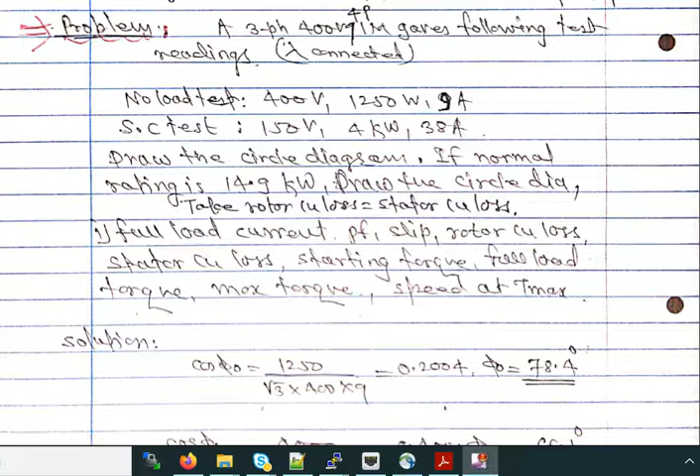Calculate full load current, power factor, slip, rotor copper loss, stator copper loss, starting torque, full load torque, maximum torque, speed at maximum torque, etc. Now from the no load test, we can find out the cos phi 0, and from this phi 0 and the I0 equal to 9 ampere.

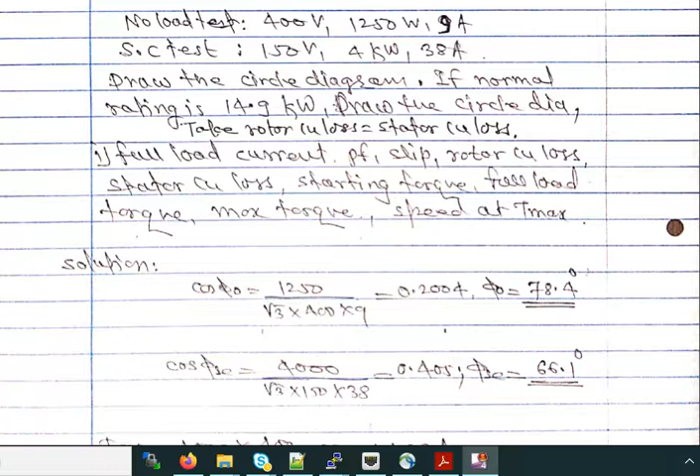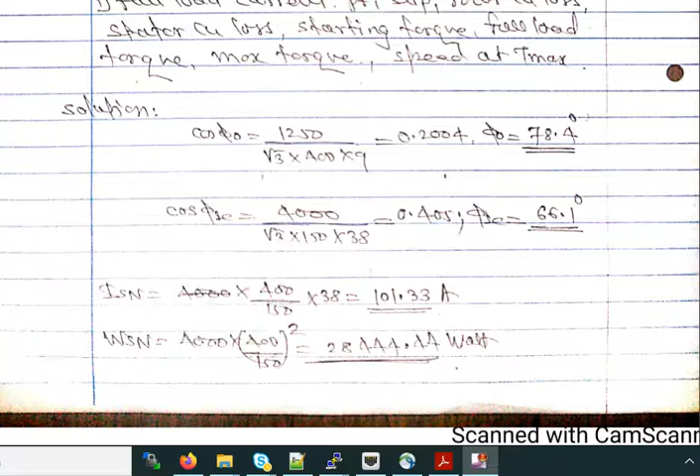Now from the short circuit test, we can obtain the phi SC which is equal to 66.1 degree, and ISN, the short circuit current with normal voltage applied, equal to 101.33, and WSN, that is the short circuit power with normal voltage applied, and that comes to be 28,444 watt. Now using this data, let us draw OX as the x-axis and OY as the y-axis.

The voltage vector represents the y-axis. Now draw OO' equal to I0 equal to 9 ampere, that is equal to 1.8 centimeter, with the scale 1 centimeter equal to 5 ampere. Students, always select the scale in such a way that the diameter of the circle diagram will be around 25 centimeter. This is because all the parameters can be easily visualized,

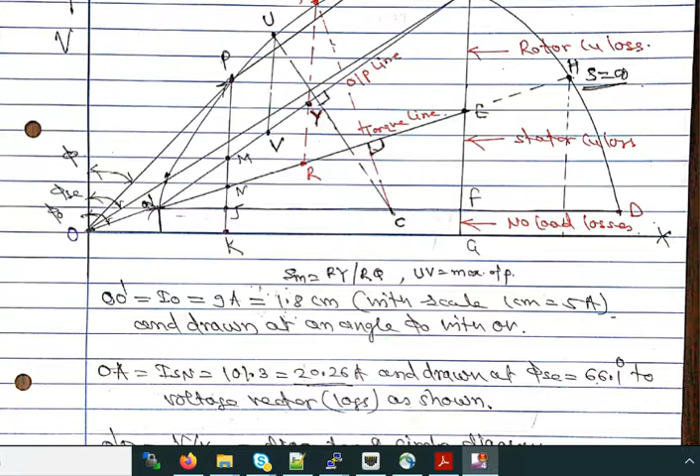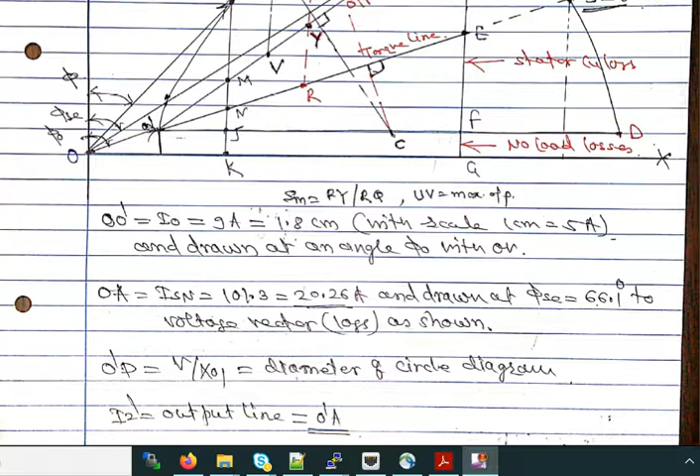and the measurement taken will be reasonably accurate. Then OA equal to ISN, and that is equal to 20.26 as per the scale. Now draw this OA by making an angle phi SC with the voltage vector. Then join O'A. This O'A represents the rotor current I2' referred to the stator side, and it is also known as the output line. Then draw the line O'D parallel to the x-axis.

Now the points O' and A lie on the circle diagram. Now obtain the center by drawing the line perpendicular to the output line, which is a right angle bisector. Now from center C and radius CO', draw the circle diagram. Now the points O', A and D lie on the circle diagram. Now from the point A, draw the vertical line perpendicular to the x-axis.

Now this AG represents the short circuit power with normal voltage applied. Out of that, GF is the fixed losses and AF is the total copper losses, that is rotor copper losses and stator copper losses. Then the line represents the torque line which separates the rotor copper losses and stator copper losses. When you extend the torque line so that it cuts the circle diagram at point H, it represents the slip at infinity.

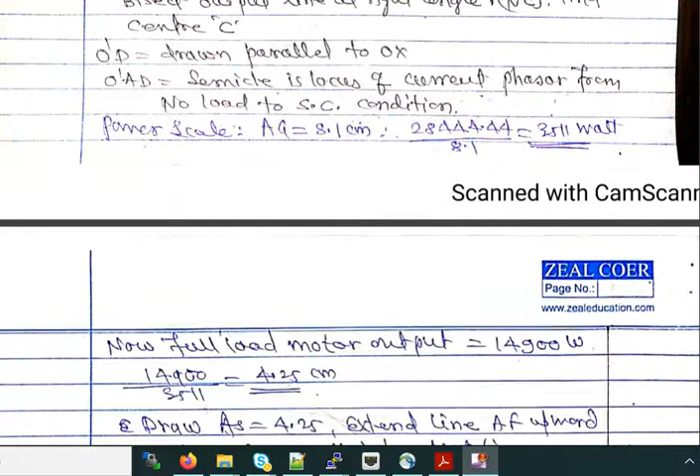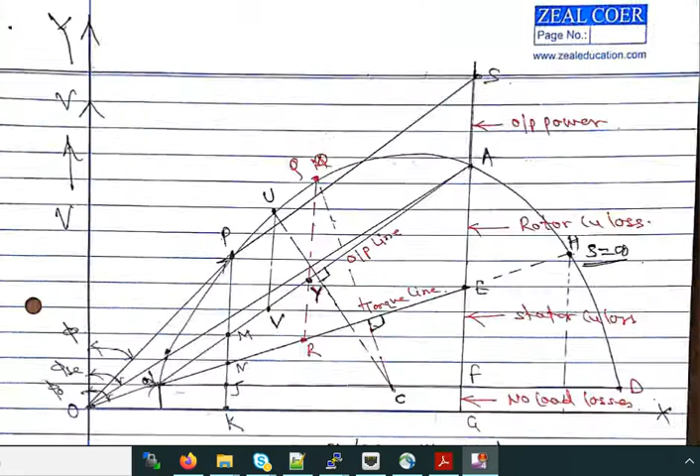Then measure AG, that is equal to 8.1 centimeter, and from this we can obtain the power scale, that is equal to 28,444.44 divided by 8.1, that is equal to 3,511 watt. Now the full load motor output equal to 14,900, and therefore as per the power scale it will be 4.25 centimeter. Then draw the line AS 4.25 centimeter. Extend from point A as AS, and that measures 4.25 centimeter.

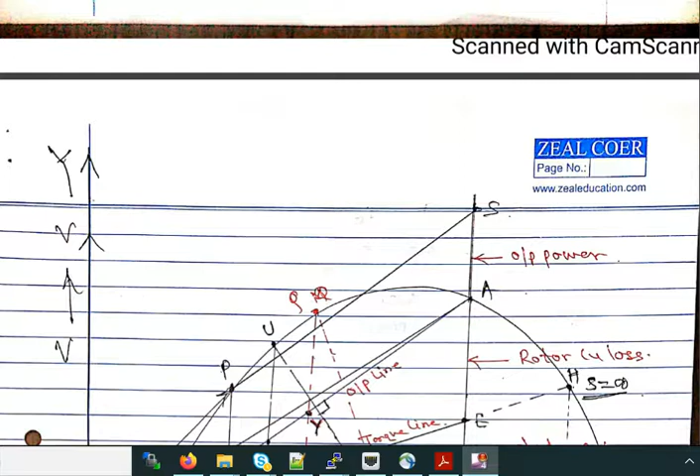Then draw the line PS parallel to the output line. Then the point P intersects the circle diagram. From the point P, join O. That means OP represents the full load current lagging the voltage by an angle phi. Now from this point P, draw the vertical line that is perpendicular to the x-axis, that is PK.

Then make the marking points M, N, J, etc. Now let us find out the full load current, that is OP, and that is measured 6 centimeter, and therefore OP equal to 30 ampere. Now this is 6 centimeter, and as per the scale, 1 centimeter equal to 5 ampere, it is equal to

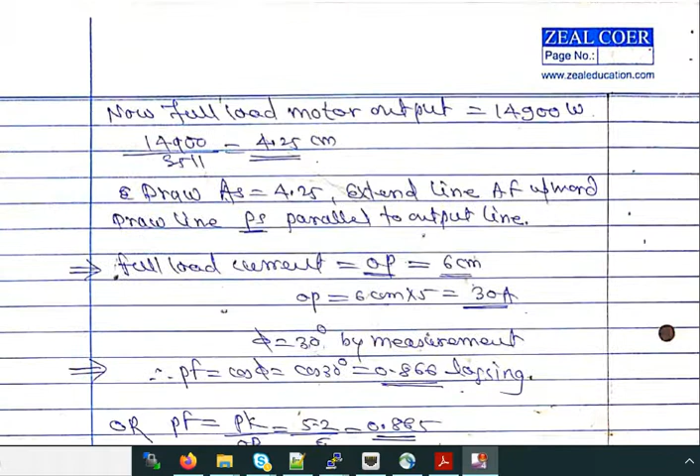30 ampere. Now the power factor, if you measure this phi, it is found 30 degree, and therefore cos phi equal to 0.866 lagging, or otherwise power factor equal to Pk upon OP, and Pk upon OP, that is measure 5.2 divided by 6, equal to 0.865 lagging.

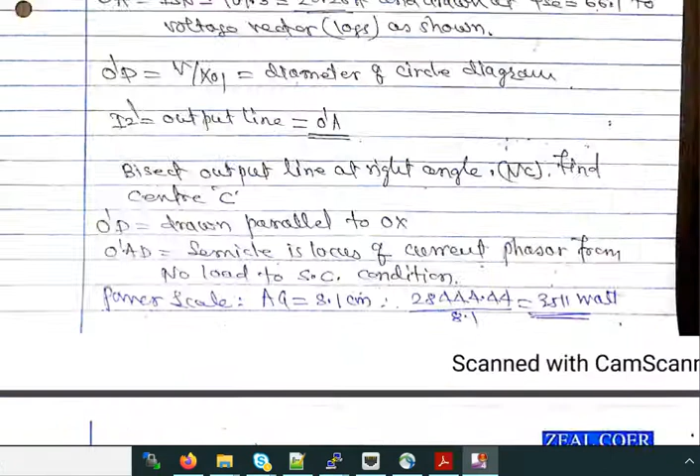Now let us see the slip. Slip equal to rotor copper loss upon rotor input. Rotor copper loss, here Mn represents the rotor copper loss, which is proportional to the starting torque, and Pn measures the rotor input, which is proportional to the full load torque. Now here slip equal to Mn divided by Pn, and that measures to be 0.3 divided by 4.5, and that is equal to 0.067. Thus the slip is 6.7%.

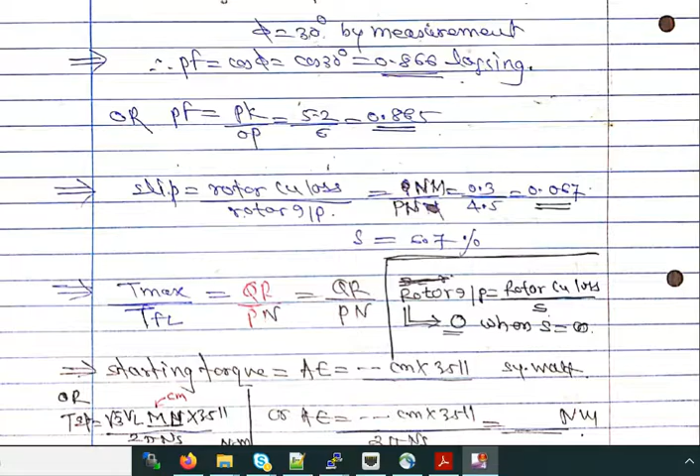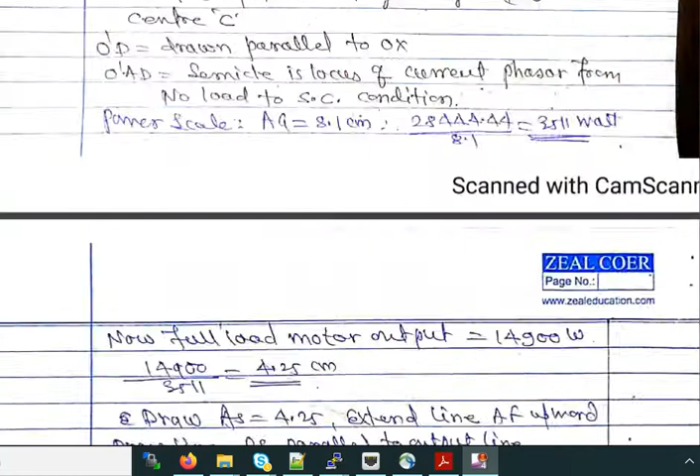Now let us observe here the AE represents the rotor copper loss, and EF represents the stator copper loss, because these two losses are equal, it is given to us. Therefore this AE is nothing but rotor copper loss, and that is directly proportional to the starting torque. Therefore starting torque TST equal to AE to the scale multiplied by power scale divided by 2 pi ns. See, this starting torque equal to AE in centimeter multiplied by this divided

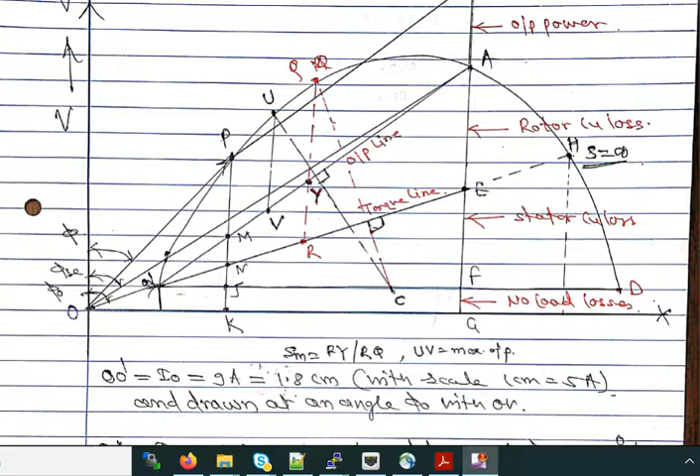by 2 pi ns. This is the starting torque, or this can also be obtained by, see here, the starting torque is represented by Mn, and therefore as the voltage vector is vertical, all the vertical measurements are the active power, and therefore starting torque equal to root 3 VL Mn in centimeter multiplied by power scale divided by 2 pi ns. So in this way we can obtain the starting torque root 3 VL into Mn in centimeter multiplied by power scale divided by 2 pi ns.

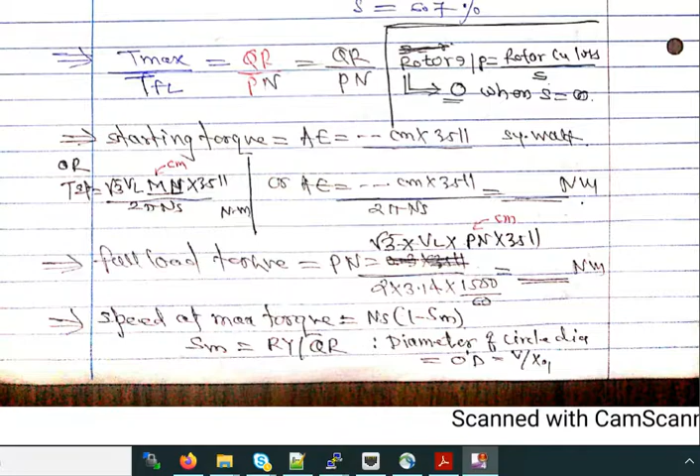Similarly, we can obtain the full load torque, that is equal to root 3 VL into Pn in centimeter multiplied by power scale divided by 2 pi ns, that is Newton meter. Now here, see, the Pn represents the rotor input, and that is proportional to the full load torque.

Now the maximum torque is obtained from the line CQ, which is drawn perpendicular to the torque line, and the Q is projected on the torque line. Therefore, QR represents the maximum torque. And similarly, the line CU is drawn perpendicular to the output line, and UV drawn vertically, which cuts the output line, measures the maximum output.

Now here from the maximum torque, the slip at maximum torque equal to the rotor copper loss divided by rotor input, and therefore equal to Ry divided by Rq. In this way we have obtained the slip at maximum torque. Now let us see the overload capacity. Overload capacity of the motor is given by maximum output divided by full load output. Maximum output is UV divided by PM. That is your overload capacity.

Then we can also obtain, now here at the point O, it is a no load condition where the speed is nearly synchronous speed, and therefore slip is nearly 0. Then at point P, this represents the full load point, and therefore slip at the point P is SF. Now at point Q, that represents the maximum torque, and therefore slip here is Sm. And at point A, that is at the starting when blocked rotor, therefore S equal to 1, and at point H, S equal to infinity.